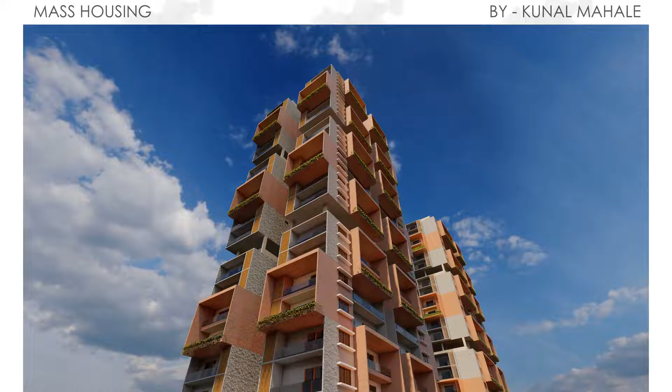This image shows us the 1 BHK apartment in which one could easily see the alternate terrace projecting out. The windows and balconies are planned to make use of this draft and cross-ventilate the apartment.

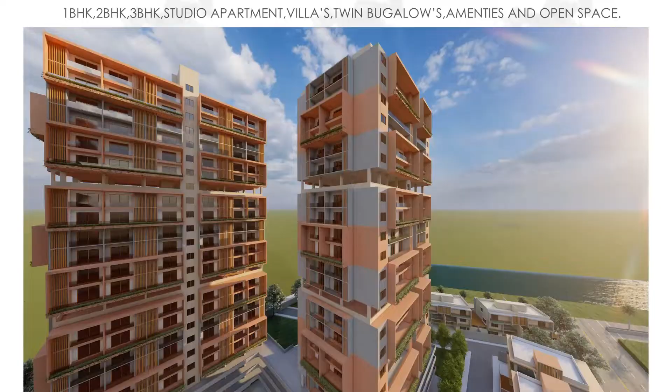Mass housing. What is mass housing? Mass housing is a group of housing catering to the demand of generating superior homes befitting all categories of families. In this image, one could see the use of innovative and cutting-edge designs for developing customer-focused and ecological homes.

Now we'll have a look into some national and international case studies of mass housing. Villa Verde, which is located in Chile. Due to the bad tsunami conditions there, people always used to lose their home. So government decided to launch sustainable mass housing for LIG people there.

In the second image, you could see next to each built section of row house is an open space of the same size into which residents can expand their house. Innovation in the built environment in this project did not come from new materials, new techniques, or new system. It came from having the courage to follow common sense ideas, to understand the needs of people of Constitución, and by viewing the problem in terms of both micro and macro environments.

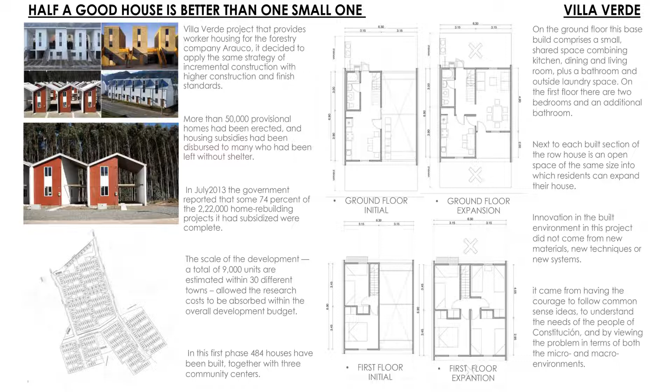Another case study is Another Sky, which is done by Designhaaus Solutions and which is situated in Bangalore. In this, there are three towers which are attached to each other and are placed in staggered fashion to have openings on all four directions.

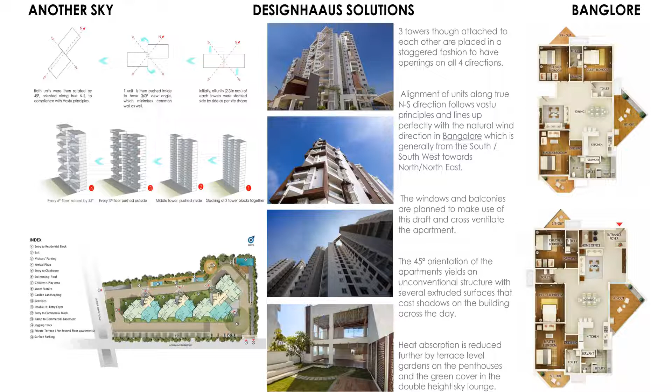The windows and balconies are planned to make use of the draft and cross ventilate the apartment. As we could see in the second image, the 45 degree orientation of the apartment yields an unconventional structure with several extruded surfaces that cast shadows on the building across the day.

Site analysis. Site is located in Nashik at Bapu Pool, which allows the wind flow and proper sunlight. Average temperature of Nashik varies from 20 to 27 degrees Celsius.

Now looking at the site, access to the site itself poses a strategic position and the site shares three-way connectivity. The site has main access road, riverside cruiseway of 12-meter width. The site has a scenic view of river Godavari in south while clear views are in all directions.

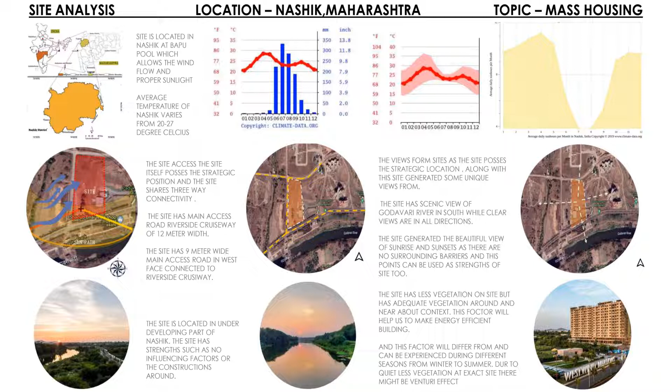The site has less vegetation on site but has adequate vegetation around and near about context. This factor will help to make energy efficient building.

Concept, site development and form development. These three buildings are planned in such a way that each building is surrounded or backed up by open spaces as we could see in image 1. Buildings with view of open space and Godavari river.

All the buildings have been carved out into final outcome blocks by same size of rectangle which is 30 meter into 20 meter. While carving out blocks, they become different in internal planning due to the needs and functional requirements of different apartments. In the third image, we could see the sketch of projecting blocks into projecting balconies.

Each facade of the building is unique and cube canopies have been created at every alternate level. One facade has a view of river Godavari while the other has view of open spaces. The last three images are the 3D images of the buildings in which you could see the projection of balconies have been achieved.

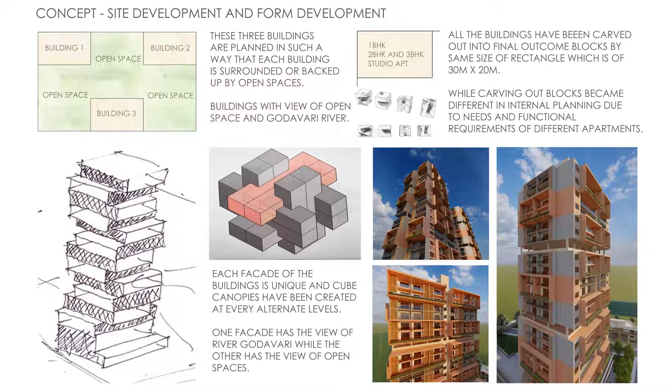Now we look into ground floor plan. While entering into the site from west, we have future expansion to the north side. To the left, we have villas which are road facing and twin bungalows facing towards Godavari River.

At the center of the site, the most prominent area is wholly dedicated to huge built masses which are 1 BHK, 2 BHK, 3 BHK and studio apartments.

Following the apartment spaces, we could see the proper division of open spaces after each building which allows good cross ventilation throughout the building and ample amount of sunlight into the structure.

At the ground level, we also have most of the amenity spaces such as grocery shops, medical shops, garage, ATM and petty shops. For infotainment area, we have gym, indoor sports, library and isolation area which has become a need of the hour in every emergency health situation nowadays.

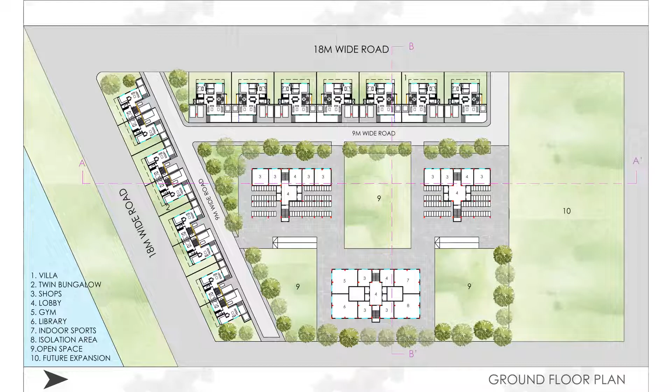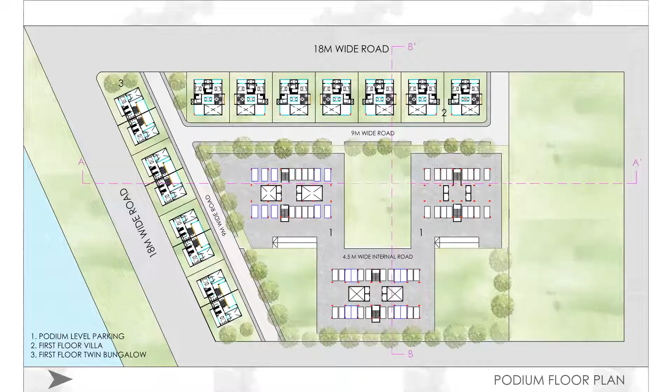In this image, you could see three buildings with panoramic view of garden and goddess river Godavari. 2 and 3 BHK apartment. 3 BHK flat area 120 square meter.

3 BHK total flats: 36 flats. 2 BHK flat area 100 square meter, total flats: 36 flats. 3 BHK and 2 BHK apartment holds the most prominent place in the whole site overlooking the river and open spaces.

There are two 2 BHK tenements and two 3 BHK tenements on one floor plate. As one comes from staircase to passage, we enter into the 2 BHK flat area, we get into lobby space. We could partially see dining space through the pergolas which acts as a threshold space.

After lobby comes living area with following balcony, and the passage leads us from living to kitchen, common toilet, and after that leads to one common bedroom to the right and one master bedroom towards left.

As we enter into the 3BHK apartment, we get into the lobby space, and to the left we have one master bedroom. After the lobby comes the living area followed by the balcony area, and the passage leads us from living to kitchen, common toilet, and after that leads to one common bedroom to the right and master bedroom towards the left.

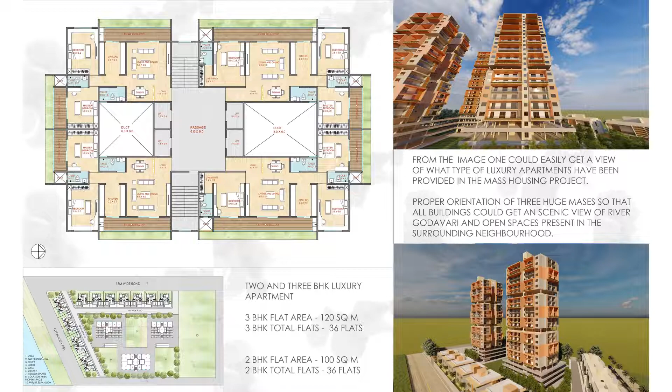From the first image, we could easily get a view of what type of luxury apartments have been provided in the mass housing project. In image 2, we could see proper orientation of three huge masses so that all buildings could get a scenic view of river Godavari and open spaces present in the surrounding neighborhood. Three buildings standing out tall, a perfect example of how the concept of cubing and massing is carried out in all structures.

1 BHK apartment: 1 BHK flat area is 60 square meters, 1 BHK total flats are 72 flats.

As we get from the staircase to the passage area, we get into the lobby. We could partially see the dining space through the pergolas, which acts as a threshold space. After the lobby comes the living area followed by the balcony, and the passage area leads us from living to kitchen, common washroom and common toilet, and after that leads to the one common bedroom to the right.

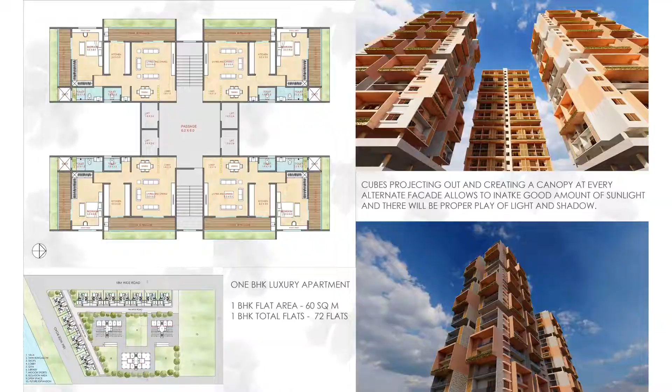From the first image, we could see the cubes projecting out and creating a canopy at every alternate facade, allowing it to intake a good amount of sunlight, with a proper play of light and shadow in the whole structure. The concept of alternate terrace cubing is carried in all the apartments, but every apartment's cubing is different in its own way.

Studio apartment: double sharing flat area is 20 square meters, double sharing total flats are 144 flats; triple sharing flat area is 30 square meters, triple sharing total flats are 108 flats.

As we get from the staircase to the passage area of 1.5 meters, it leads us to the various studio blocks. It includes 6 triple sharing studio blocks and 8 double sharing studio blocks.

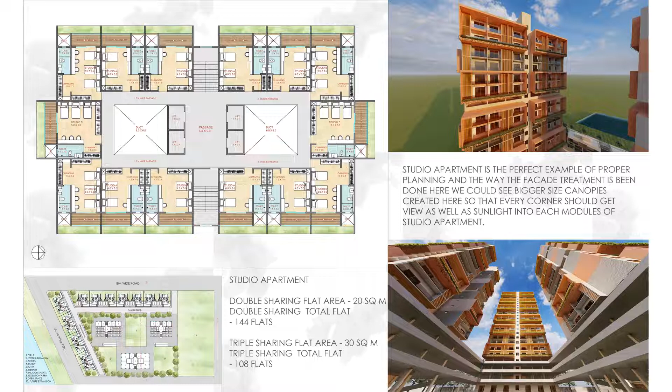The studio apartment is a perfect example of proper planning and the way the facade treatment has been done. As we could see in the images, bigger size canopies have been created so that every corner should get a view as well as sunlight into each module of the studio apartment.

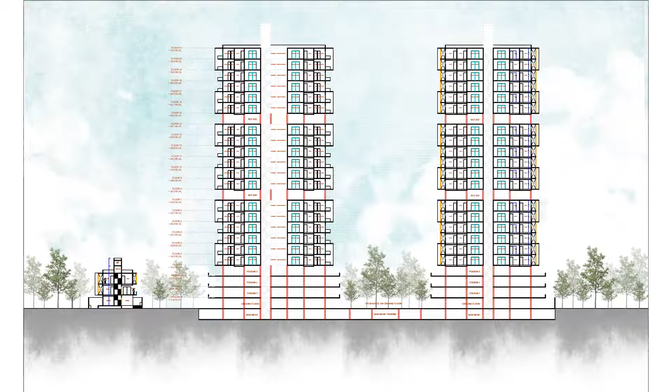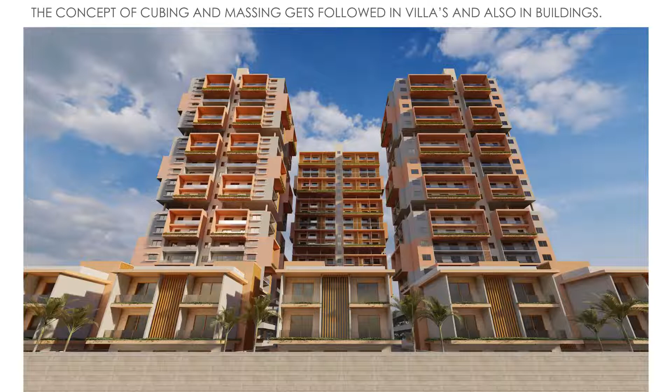This is section AA, which is cut from the twin bungalows, 2 and 3 BHK apartment, and 1 BHK apartment. This is section BB, in which we could see it is cut from the studio apartments and villas. The concept of cubing and massing gets followed in villas and also in buildings.

Villas in mass housing: total villas are 7, plot area is 350 square meters, built up area is 300 square meters. Now we'll see the ground floor plan. While entering from the veranda to the villa is a treat to anyone. While entering, we have double height living space which creates visual transparency. Following that, we have the dining area, kitchen area, and one common bedroom and toilet at ground level.

First floor plan: while getting up from the staircase, we have a double height dining area and overlooking living area, plus the deck space and two master bedrooms. On the second floor plan, from the staircase we have the family sitting area, two master bedrooms, swimming pool area, and deck space.

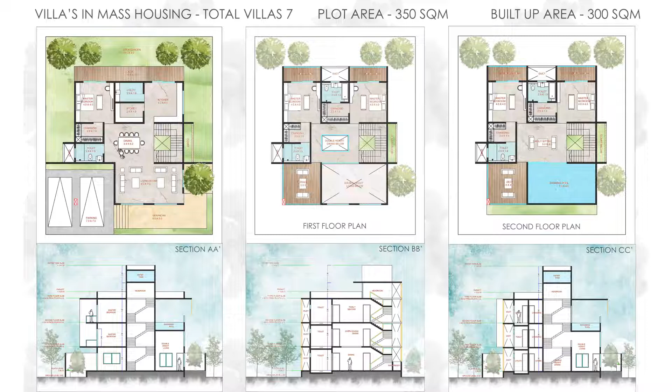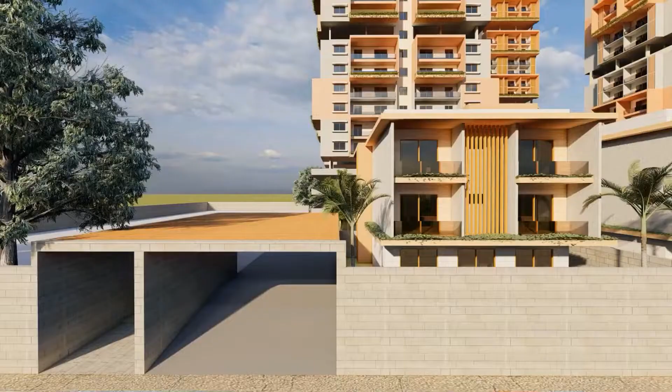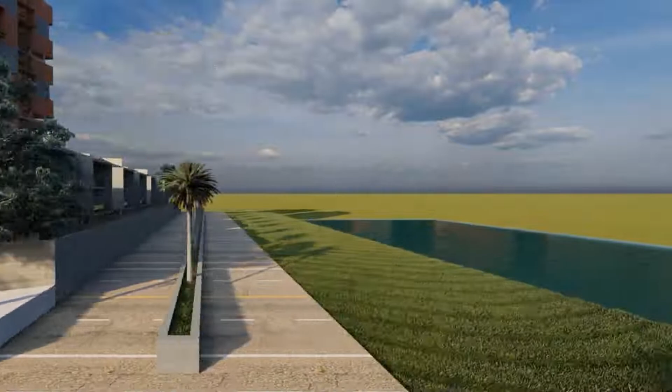Twin bungalow in mass housing: total 8, plot area 250 square meters, built up area 200 square meters. Ground floor plan: as we get from the veranda to the twin bungalow, it is a treat to anyone. While we enter into the twin bungalow, we have double height living space and the dining area, which helps in visual transparency. There is a kitchen, common bedroom, and common toilet at the ground level.

As we get up to the first level, we have a 1.2-meter passage which leads us to the terrace. The terrace is given here because it can be converted into a room later, and we also have one master bedroom with a balcony at the first floor plan.

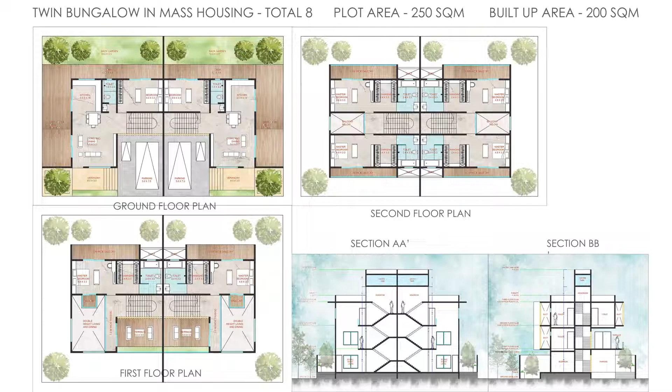Second floor plan: as we get up to the second floor plan, we have two master bedrooms and double height, and there is a triple height dining area and balcony level visible from the first floor level. Below we have section AA and section BB, which are done in detail.